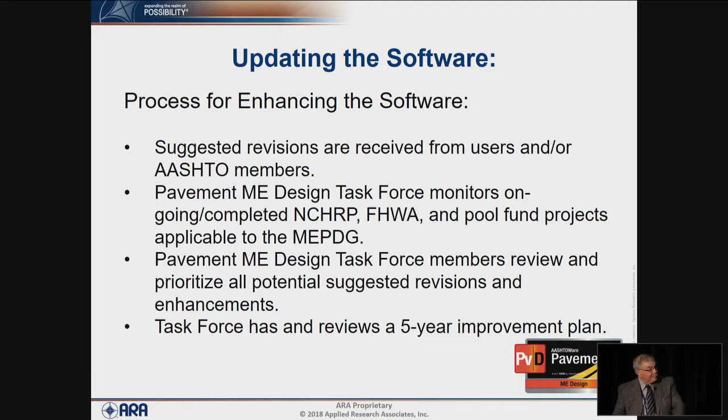The task force has a 5-year improvement cycle. This plan gets updated every year, and some enhancements that are high priority may become lower priority and vice versa. So there is a process for that.

After an enhancement has been integrated into Pavement ME, there's a specific process used to acknowledge that through the community, because the manual of practice for the Pavement ME software isn't updated that often. That manual gets balloted just like normal test procedures through AASHTO, and an addendum is prepared explaining the purpose of the enhancement.

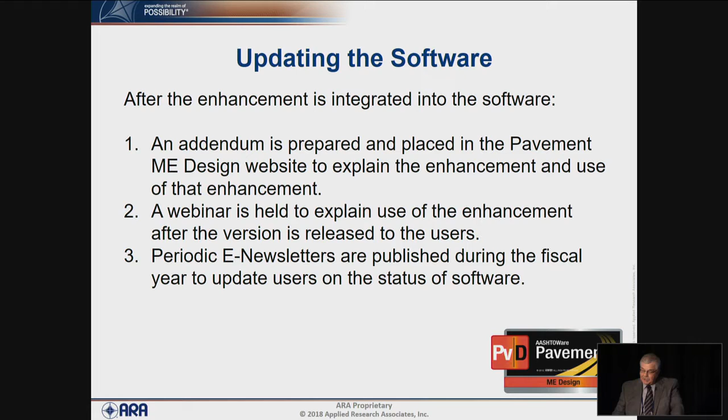What the enhancement is intended to do, and how to use the software for it. After the software is released, which is always July of each fiscal year, there's a webinar held to explain and discuss the enhancement and how to use the software for it. There are also electronic newsletters published through AASHTOware for Pavement ME on the status of the software, improvements being made, and other items of general interest to users or license holders.

Now a little on the enhancements that have been added to the software over time. This is simply a listing of those specific or applicable to asphalt and flexible pavements by fiscal year. As you can see, in fiscal year 2018 there were a number of enhancements made. These do not include enhancements specific to concrete or rigid pavements—only those associated with flexible pavement design and asphalt concrete materials. I'll go through some of these in more detail, since I consider them some of the important ones that have drawn more interest from users.

The first one is just a back calculation tool. Even though it's not an enhancement directly in Pavement ME, it's a tool to help with rehabilitation design, using Pavement ME to do back calculation of layer moduli, and then how those back-calculated modulus values and other appropriate parameters get entered into the Pavement ME software.

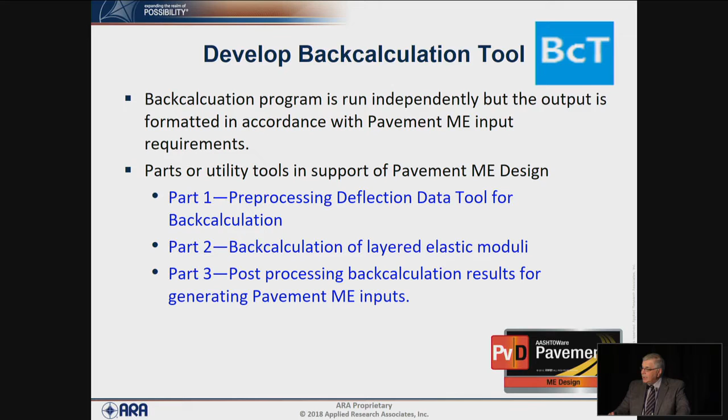The back calculation tool consists of three different parts. Part 1 is pre-processing of the deflection data to analyze and evaluate it by itself. Part 2 is the actual back calculation of the elastic layer moduli. Part 3 is the post-processing of the back-calculated values that then go into Pavement ME.

The next topic has been an ongoing issue: the first climatic data sets were ground-based, and there was a lot of missing data in some of those stations—many stations were missing, with limited time coverage for climate data. So the task force wanted to expand that to include more years and better coverage within the United States or North America.

Originally, the task force authorized a project to include the NARR climate data set, and within about a year that was quickly replaced with the current data set that comes with Pavement ME, referred to as MERRA, specifically MERRA 2. The reason for doing that is because FHWA and LTPP were moving to the MERRA climate data set and providing it for various pavement evaluation and analysis techniques. So the task force picked up on that and established MERRA 2 as the primary climate data set used for flexible pavements.

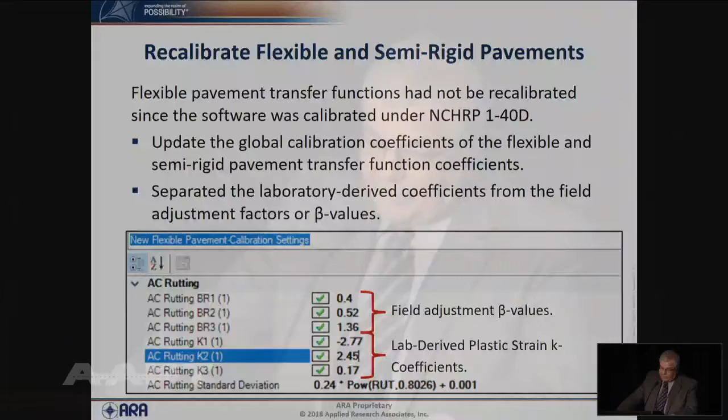Recalibration was a very large enhancement made a couple of years ago. The rigid pavements have been recalibrated about two times since the software was originally released to AASHTOWare. The flexible pavements had never been recalibrated, so this was the first recalibration since the software was released to AASHTOWare, from NCHRP Project 1-40D.

On the surface, it looks like there are very big changes compared to earlier versions of Pavement ME. But the differences really aren't that big for fatigue cracking, some difference in rutting, and not much for low temperature cracking.

We diverted back to what Matt Witczak originally did in calibrating the original software: start with laboratory measured values and then apply the beta values as the field shift. Before the software was released, the flexible team made a decision to basically combine the laboratory measured values with the field shift, so all beta values in the earlier releases were unity, and those were the local calibration factors.

Since many agencies are starting to do material tests in the laboratory, or at least request that testing be done, we wanted to separate laboratory measured coefficients, the K values, from the field shift values, either the beta or the C parameters. That's basically what was done in this recalibration.

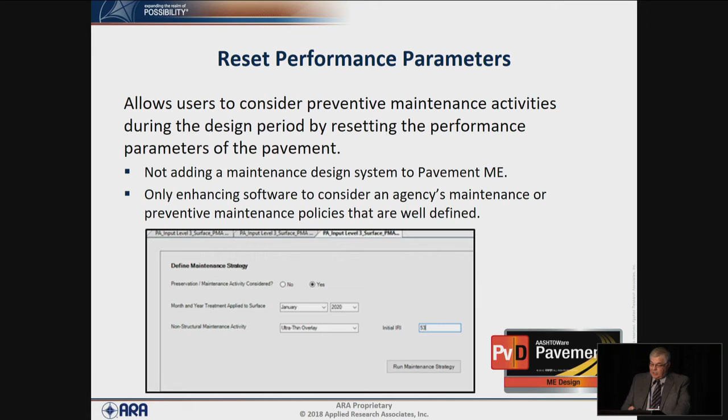Another item was resetting the pavement performance parameters. Some agencies wanted to be able to, if they were doing a non-structural maintenance or pavement preservation technique that changed the pavement surface profile, take that into account within the design procedure. The task force made that a high priority a couple of years ago, so resetting the pavement performance parameters to consider various maintenance treatments or non-structural pavement preventive maintenance treatments was included in Pavement ME.

Now going through very briefly what's coming. There are three items. The first is what many agencies have been requesting, the top-down cracking model integration. This is the model that Bob Lytton is developing, or has developed, from Texas Transportation Institute. It's based on fracture mechanics, and that current model approach is being integrated into Pavement ME currently, and should be available in next fiscal year, I'd say early next fiscal year.

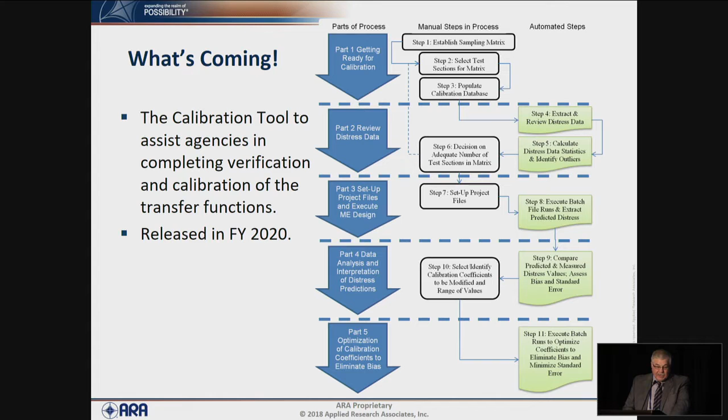The other item that's coming, also widely requested, is the calibration tool to assist agencies in doing the calibration. It's currently being developed and will be released as an assistance tool. It's not directly embedded in Pavement ME, but it's a tool to assist agencies in doing the local calibration. It consists of five parts, and it's also going to be released early next year.

A big item coming for all AASHTOWare products is moving the desktop Pavement ME application to a web-based technology application, and this will affect all AASHTOWare projects. Pavement ME, I think, is one of the first being transferred over from desktop to web-based technology interface. We're currently working on that, and it's due to be released in fiscal year 2022, approximately.

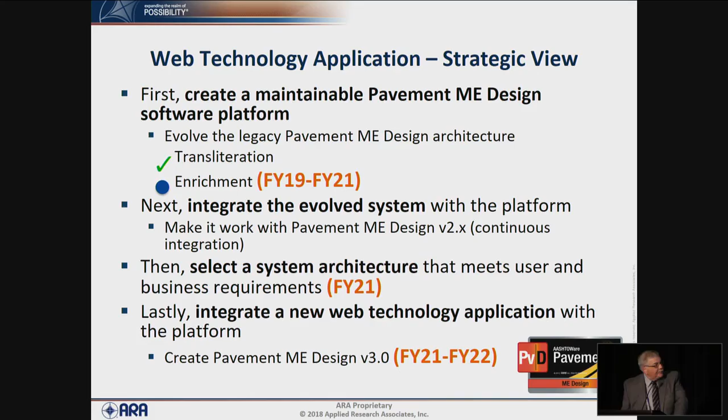I've shown in this slide some of the steps and processes being made. We started this about a year ago, and we're heavily involved now in moving it from a desktop application to a web technology application. You can see the timeline for the four major steps that are ongoing. We've completed the first part, evolving the legacy software to the new architecture, and we're into integrating the evolved system with a new platform. This is more IT, and I'm not an IT person, so I'll be very brief about that.

And basically, that's the update. So I'm going to turn it back over to Kevin.

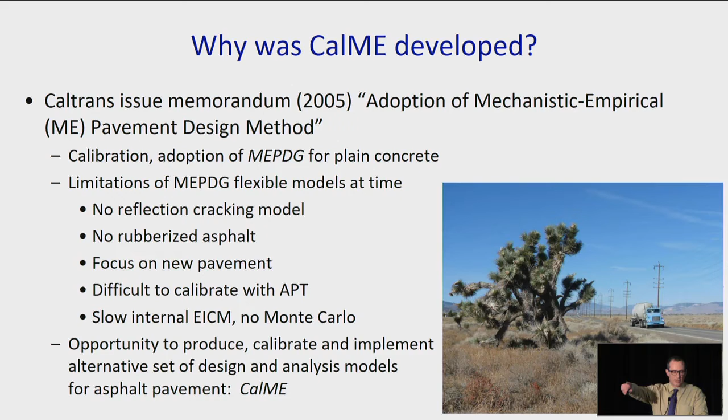Version 1 was introduced in 2006. We're on the current version of 2.0, which is also a desktop approach at this point. The focus of everything we did was on rehabilitation and preservation.

We use what's called an incremental recursive approach. How many have heard of an incremental recursive approach? Okay, so let me explain it briefly. The main idea for this came from Per Ullidtz at the Technical University of Denmark, and he was a major driver for much of the technology that we used at the beginning.

In incremental recursive analysis, you start with the initial properties of the material in terms of aging, damage, fatigue damage, and permanent deformation. In the first day, hours of the first month, you apply loads and you damage the material. You adjust and you age it. You adjust the stiffness of the asphalt based on the aging model and on the incremental damage that occurred.

For the next set of loads in the next hours, you update the damage. You proceed through every month of every year updating the damage. So what you should have, if the models are working correctly, is that you should be able to actually predict the damage in terms of loss of stiffness, change in stiffness due to aging, and permanent deformation for each month of every year through the entire life of the pavement. So that's basically what that says there.

The damage models are shown here. They include asphalt fatigue, bottom-up asphalt permanent deformation based on shear stress and strain, full-depth reclamation damage. We've got the foamed asphalt done. We're working on the cemented and engineered emulsion right now, and cold in-place recycling and cemented soils, looking at both fatigue damage from the bottom up and crushing from the top down.

Sorry, I've been teaching 2 classes and 10 hours of meetings a day, so I'm losing my voice a little bit. The distress models, then, we simulate what's happening with the damage, and then we calibrate the damage to the asphalt cracking and the unbound layers rutting.

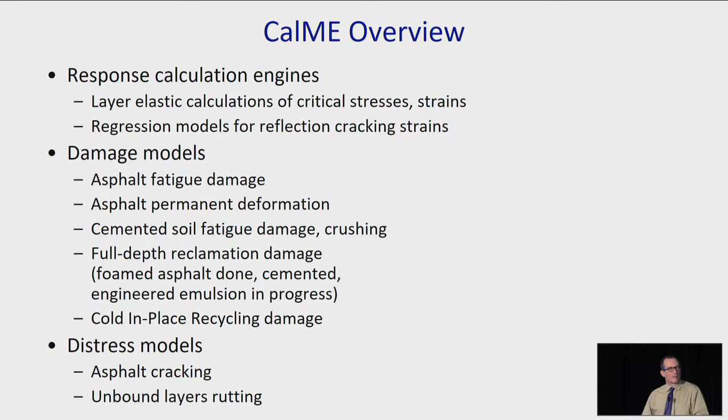Aging and rest period models are included for the asphalt. We knew historically from the shell method that shift factor can vary greatly depending on the rest periods between the traffic. We wanted to account for that. It's not well calibrated yet, but we do have a model that accounts to some degree for that.

Primarily, it helped us look at the difference between heavy vehicle simulator without stopping the loads and test tracks, which have rest periods between the loads. We're calibrated for 27 heavy vehicle simulator sections, WestTrack, some sections from the NCAT track, MnROAD, and the CEDEX track in Spain, and 4 California field sections. We use Monte Carlo simulation for reliability.

The definition of what reliability is and which variances we consider in that. Right now we're primarily looking at within-project variability, and then looking at sensitivity analysis to look between projects considering different contractors and material sources. Although that's something we're revisiting for version 3 right now.

A fundamental part of this was the development, at the same time, of a back-calculation program, because we primarily are dealing with existing pavements. We want to rely on deflection back-calculation to characterize those, both in terms of variability of the underlying structure as well as the materials properties. So CalBack was invented as a sister program that goes with that. CalBack loads directly up into CalME, gives you your materials properties, and also gives your variance of the stiffness, which is considered in the Monte Carlo simulation.

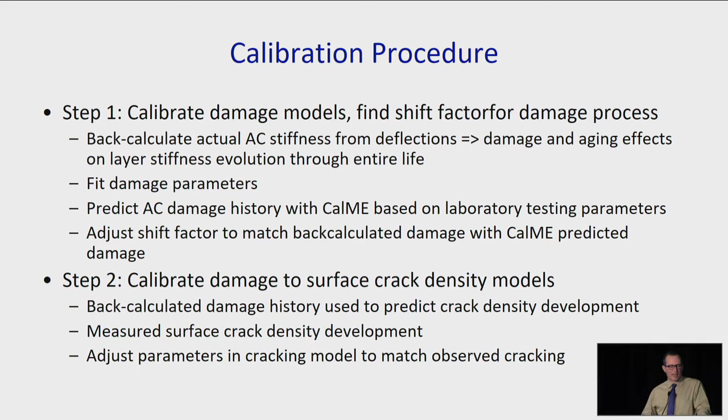The basic parameters, like Harold was saying, are developed from laboratory testing, and then we adjust those for the damage process, and then we have a separate shift factor to take us from damage to cracking, which is the second part.

Incremental recursive versus Miner's law. So we characterize the material in terms of the damage process for different strain or stress levels, depending on what's critical. We then simulate the damage process for the entire life, for each data acquisition time that we do. Then, once we've got the damage models done, we correlate damage to distress, and we calibrate the damage process using every data acquisition we do through the entire damage process.

So every time they went out on WestTrack and did back-calculation, that's a calibration point. The next time they go out, that's a calibration point. We calibrate the entire process.

With Miner's law, which was actually what we used in our precursor to this, we basically characterize the material in terms of repetitions to failure and end state. And then we look at potential paths to that end state, which occur across the first year. We get our big N from that, our various big N's, and then we estimate the little n's, the traffic that's coming, and look at that damage ratio. And then we have to calibrate to the end state.

To be able to calibrate a Miner's law, you have to have carried every one of your sections to the end state, because otherwise you don't have a data point—you have a right-hand truncated data point.

So one of the other things we knew from our APT is not all of our sections failed. Not all the WestTrack sections failed. Not all of our APT sections failed. But we can still calibrate the damage process on every single section without biasing our data set by eliminating those that didn't get to the final cracking end state.

Now the little green light's on. So this is an example. I'm afraid to push the pointer here, but I'm going to try it.

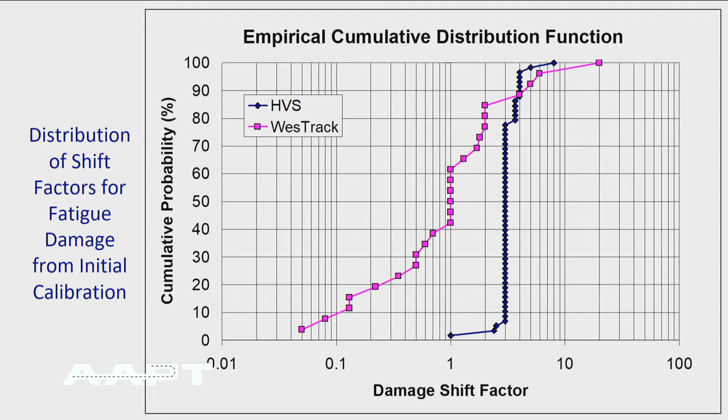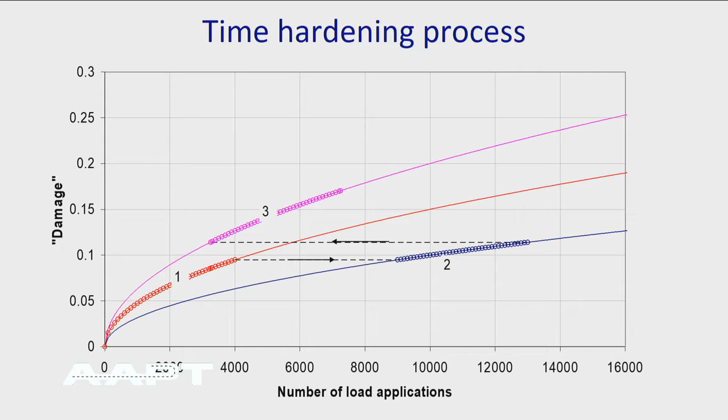How do we step between these? We use a time hardening process, which basically assumes that damage is irreversible. We've cross-checked this a bit with a strain hardening process, which moves the other direction as we move between damage curves. There was some change in the result, but this was the assumption we went with - no reversal.

We're accounting for whether we want to call it thixotropy or healing through our rest period function, which is an adjustment on our shift factor for the damage - sorry, on the damage parameter.

Time hardening, by the way, has been around. Carl Monismith suggested that from research done with Pell and others back in the 60s.

For reflective cracking, we're using the same approach as bottom-up fatigue cracking, except that the HMA bottom strain is from the finite element via regression equations. For HMA on HMA, we're using the average maximum tensile strain at the crack tip. For HMA on PCC, it's the bending strain at the crack tip, assuming local debonding of about 100 millimeters on each side of the crack, which comes from our colleagues at Tongji. We're also using thermally induced strains using models from the University of Minnesota.

This is what one of my colleagues calls a confusogram. Okay, let me move on.

No, the top is the regression equation through the finite elements. The main point is to look at the variables in this - these are variables we have very good data for. This was a finite element run in 2D. We calibrated the 2D to 3D, developed the regression equation, and calibrated that equation for the damage process.

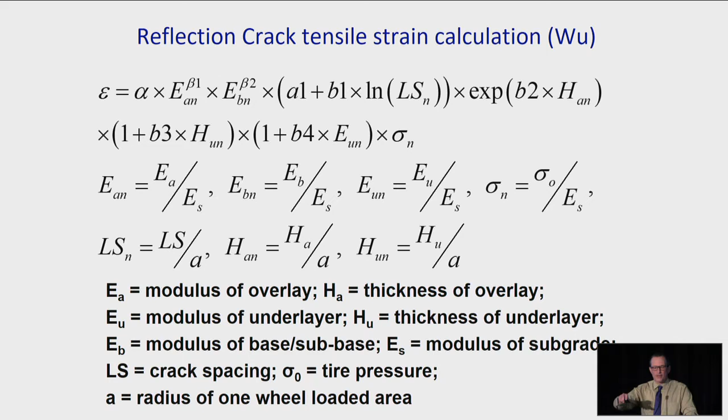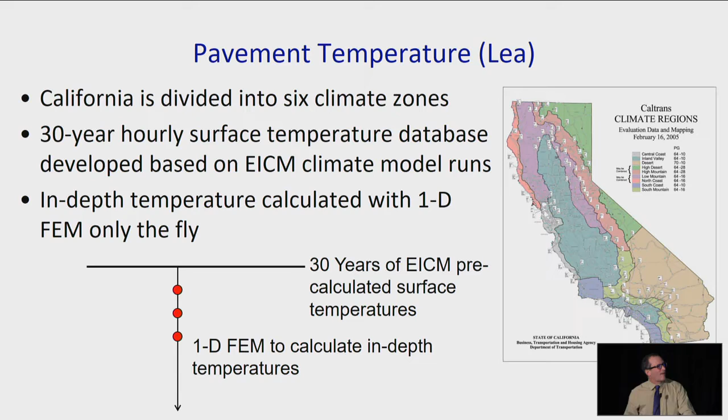For pavement temperature, we have a lot of climate zones. We're using EICM runs, but we're not running EICM directly. We use a fast 1D process that gets the surface temperature out of our EICM database and then comes up with a temperature profile. We've calibrated this and it works extremely well, and it's super fast, which allows us to run Monte Carlo.

So what we can simulate - this is one example. We've also programmed into this that you can build in your pavement preservation triggers, based on damage, cracking, or time-based maintenance, and actually simulate the entire process over 40 years.

Current stat - did I miss one?

We have a lot of weigh-in-motion data built into there so that local folks can do their class 9 to class 5 counts and predict an axle load spectrum based on regression through 115 WIM stations.

I talked about the simulation processes. The way this works now is you can run, say, 100 Monte Carlos simultaneously, walking through the 40-year analysis for all 100 of those in about 10 minutes.

Current status - this is primarily, Gail, I'll answer your question before you ask it - primarily being used for AC long life. It's in the highway design manual that any design for 40 years or longer, or a high traffic index, has to use CalME.

Caltrans, we're just learning - we haven't had any money for six years. Nobody even remembers how to do the Hveem R-value design. We're fixing that software, getting that out. We're now starting to get $2.5 billion more a year for maintenance and rehabilitation based on our gas tax.

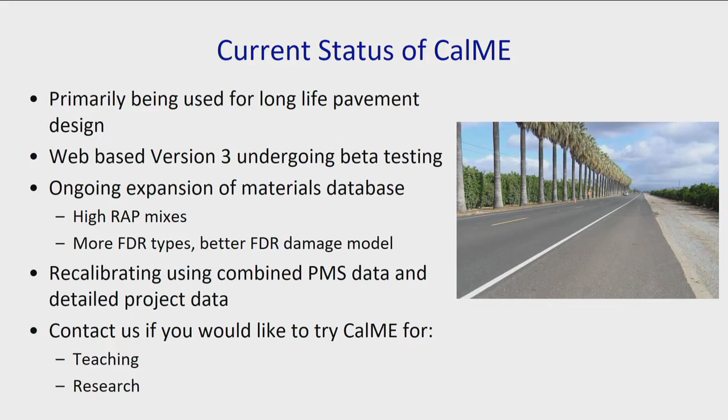And we're expanding this - we are web-based. We're beta testing the web-based version 3 right now.

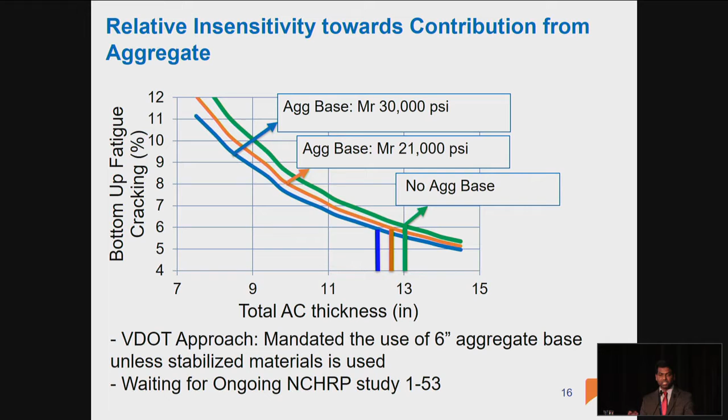What we did is mandate the use of 6-inch aggregate base, based on our experience using it as a construction platform, unless we use cement-treated aggregate. We are waiting for the NCHRP 1-53 study that Professor Bob Lytton from Texas A&M is doing. We're waiting for the results, so hopefully future MEPDG versions will accommodate the new models.

Same thing with subgrade sensitivity. If you're familiar with AASHTO 93, subgrade modulus was very sensitive, but in AASHTO Pavement ME it's not very sensitive with different subgrade types. So we haven't changed anything; we're still waiting for the NCHRP study to make changes.

The other issue is modeling semi-rigid pavement and recycled layers. Like I mentioned, we use a lot of cement-treated aggregate and cement-treated full-depth reclamation. The version we're currently using is 2.2, though one more version has since been released. But version 2.2 is very insensitive to thickness and modulus values for semi-rigid pavement - if you input different CTA modulus or thickness values, it's very insensitive.

So what we did is model it as an aggregate base, but use a high resilient modulus of 80,000 PSI, both for the cement-treated and FDR cases.

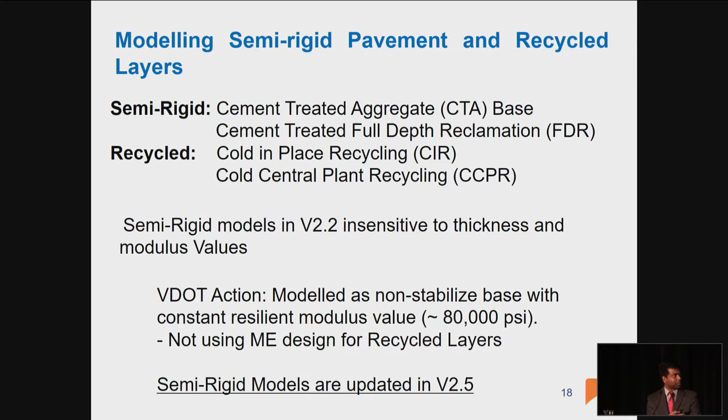For recycled sections, both cold-in-place recycling and cold central plant recycling, we are currently not using MEPDG. There's a challenge because when you use CIR and CCPR as a flexible layer, like Harold mentioned, Pavement ME is very sensitive to air voids and asphalt content, and the bottom-up fatigue cracking model uses the bottom layer, which in this case would be the CIR. In the field you usually get higher air voids for the recycling section, so you have to be careful when inputting.

Another issue is sensitivity to asphalt mixes. We developed only one calibration factor for asphalt mixtures. When we use SMA mixtures, it predicted very high rutting, which is against our field experience. This is because SMA mixtures usually have higher binder content, and when tested in conventional dynamic modulus testing, it gives lower modulus, which in turn predicts higher rutting. So we plan to develop mix-specific coefficients for SMA in the future.

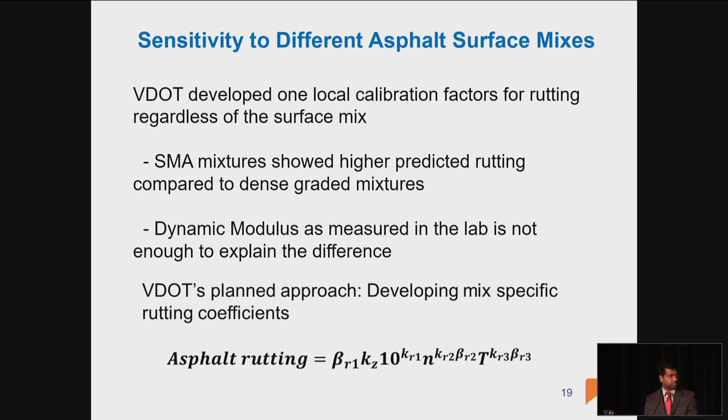Outreach is very important. We formed a technical working group with members from VDOT, both asphalt and concrete pavement industry, aggregate industry, and federal highway. We discussed all the issues and came up with solutions, and got their support, which was very instrumental in the implementation.

We also trained our local consultants. Some lessons learned: for implementation we need help from all the different divisions within the agency, like materials, maintenance, construction, and we also need industry and external stakeholder support. Training is a very important factor, and developing a user manual was very instrumental in the success. Local calibration is key.

Sites need to have a certain level of distress. We need to develop a well-established database, so whenever a future version comes out, it's easy to do a local calibration.

We need to have both short-term and long-term plans. Short-term plan is how to update the ME user manual. Future long-term plan is how often we have to do local calibration, how often we have to characterize the materials or traffic inputs. Those are the long-term plans.

For future steps, currently we are using this for new construction or reconstruction. Most of our work is on the rehab side, so we wanted to use this in rehab design also. We are currently working on more material characterization, and we have yet to install the new version. Before that, we have to do a lot of sensitivity analysis. Harold mentioned climate change, and we have to do a sensitivity analysis for what changes that brings.

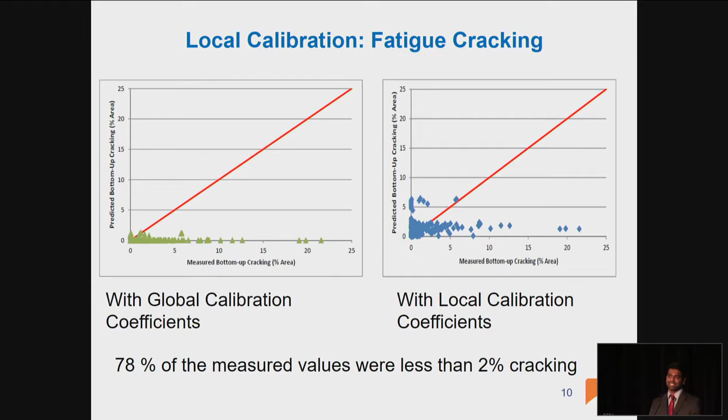Thank you. Thank you.

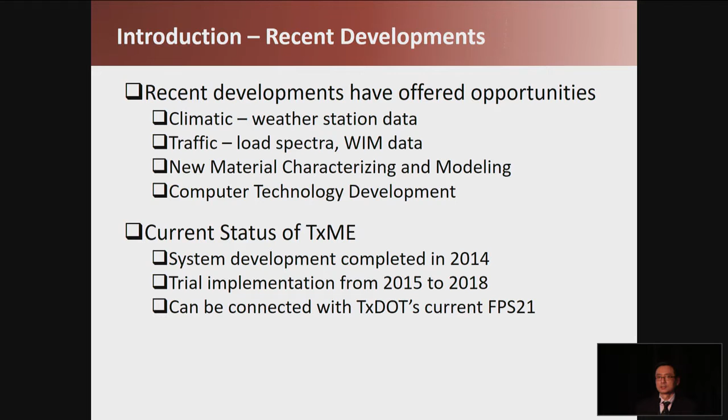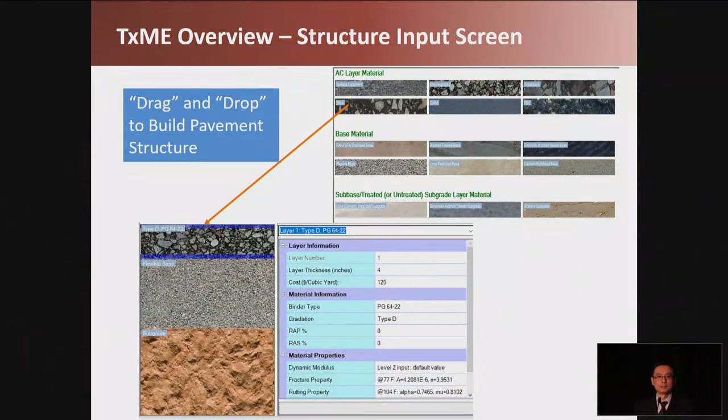So here is the structure input screen. Basically, we have several material type icons listed in the screen. Users can drag these icons and drop them to build the pavement structure directly. Then for each layer, users can click the layer to input the layer thickness and other material properties.

For the climate input, users only need to select the weather station, and the program will automatically load the hourly climate data into the program, which will be used to determine the pavement temperature at different depths.

For the reliability input, users can input the coefficient of variance for different inputs, like thickness or modulus, and the Rosenbluth method will be used to perform the reliability analysis. This method is faster than Monte Carlo because the number of simulations required is much less, so it will be much faster.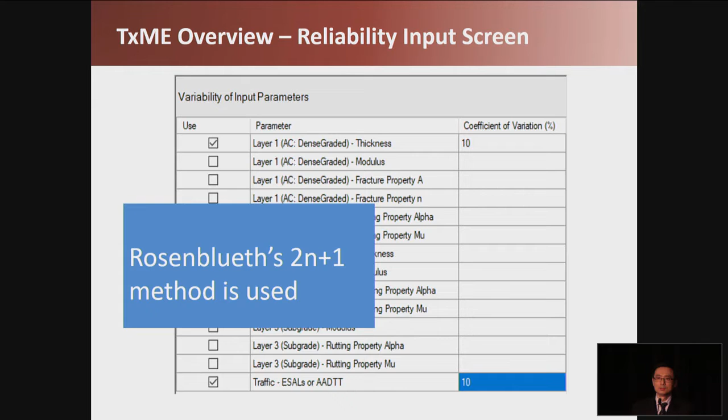And for the traffic part, I will have more screens later.

To make the program more convenient and more practical, we tried to develop a default value system. For example, for the material property default values, we developed the properties for almost all Texas typical mixtures.

In this study, we focus on the influence of the RAP-RAS contents. Here is an example of the test matrix used to determine the default values. You can see here, for example, this is Type D, a dense gradation. We have different binders, and for each binder, different RAP content and different RAS content. Similarly for the SMA with different binders. So this is the test matrix we used to try to find relationships for these material properties.

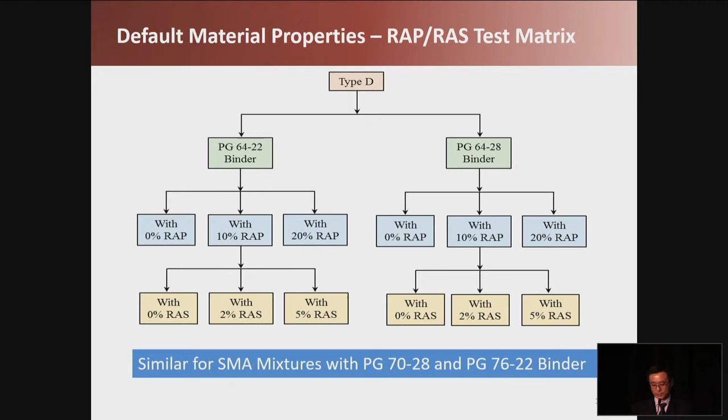Similarly, we did this test for the fracture properties and the rutting properties. So we developed these default material properties and incorporated these values into the program.

Here we show the input screen for the material property. Users only need to choose the binder, the PG grade, the gradation like Type D or Type C, and the RAP content and the RAS content. Then the dynamic modulus, fracture properties, and rutting properties will be automatically displayed in these items.

Of course, if users have lab test data, they can input it and modify these values. But here we provided this default value system, so that will make the program much more convenient to use. Users—it's not realistic to expect that users always have all complete, detailed information.

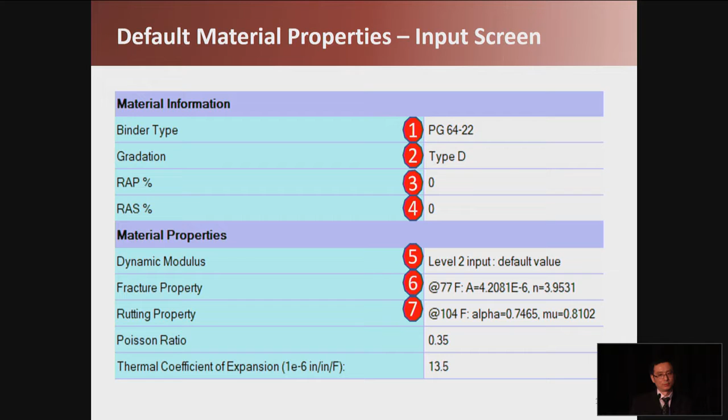For the default load spectra info, we all know it's sometimes very tedious to prepare and input this load spectra info because there's a lot of numbers involved, like vehicle class distribution, axle load distribution, monthly adjustment factor, and vehicle class distribution. There's so much data.

So here we use the WIM station data from Texas and divided this data into different categories. For example, based on the road, we divide it into 4 types of road: interstate highway, state highway, farm road, and energy section. Energy section is the area where we have gas and oil.

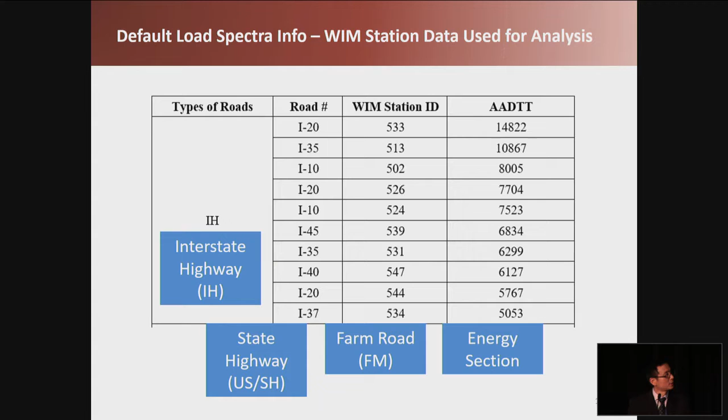So here the table shows the weigh station, or the WIM station, in the interstate highway.

So we based on the volume of vehicle class 9, the 18-wheelers, to divide this volume into 3 categories: heavy volume, medium volume, and low volume.

Similarly, for the axle load distribution, we also divided this into 3 categories: heavy axle load, medium axle load, and light axle load. Because the axle load is different from the volume.

Although the truck can be empty or can be full, so the actual load is different.

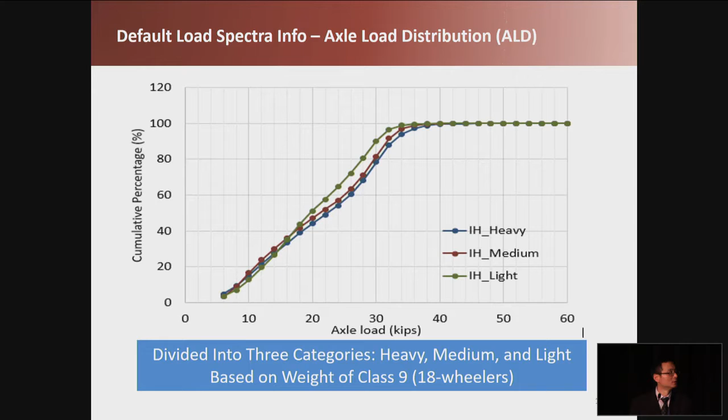Basically, in the program, users only need to select the highway type and the vehicle class distribution type, like high, medium, or low, and also the axle load type.

Then the vehicle class distribution numbers and the axle load distribution, monthly adjustment factor, and all this information will be incorporated and loaded up in the program. So users do not need to input any numbers.

If users have the WIM station and have the detailed numbers, they can edit and modify these numbers.

So to verify the program, we identified 11 test sections in 6 districts. For each section, we collected the material for each layer and conducted a lab test to determine the material properties, and also collected the traffic information and input all this information into TxME to make predictions.

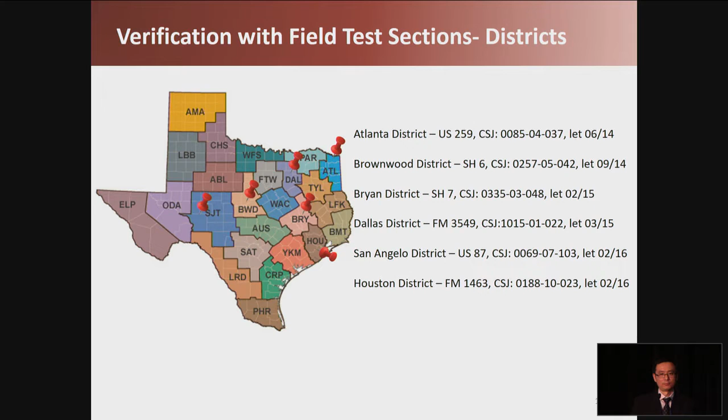Also, we conducted a performance survey. We want to compare our prediction with the field performance, with the survey results.

For the traffic, when we assemble traffic information, there are 2 resources we can use. First, we can use the TxDOT statewide planning map.

In this map, for each road, users can get information like the AADT value and the truck percentage. Based on that, we can calculate the ESALs.

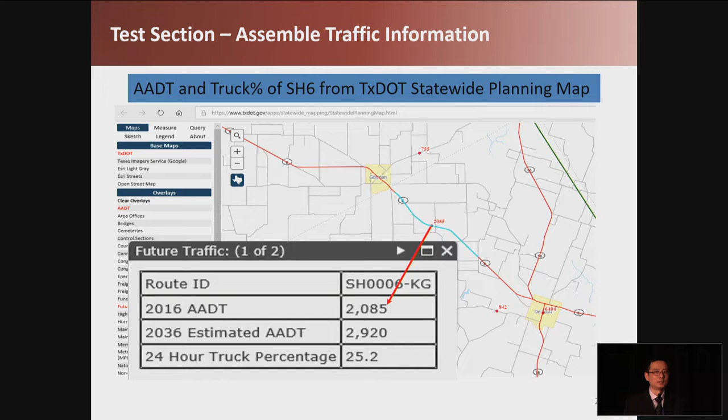Or we can use our portable WIM data. We put sensors on the road to collect the detailed load spectrum information using this portable WIM station. So this is in the real test section, SH6.

So I will compare the SH6 to present that comparison result.

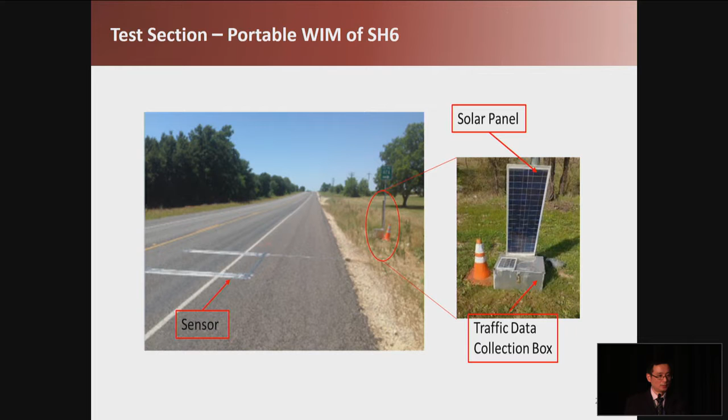So basically for the 11 sections, more than half of them, because the time is not long, didn't show any rut depth or any cracking. And also our prediction also didn't show any crack or rut at this time.

For test sections like SH6, SH7 section 1, and FM 3549, we did see some failures - the first 2 had rut depths, and this one showed thermal cracking.

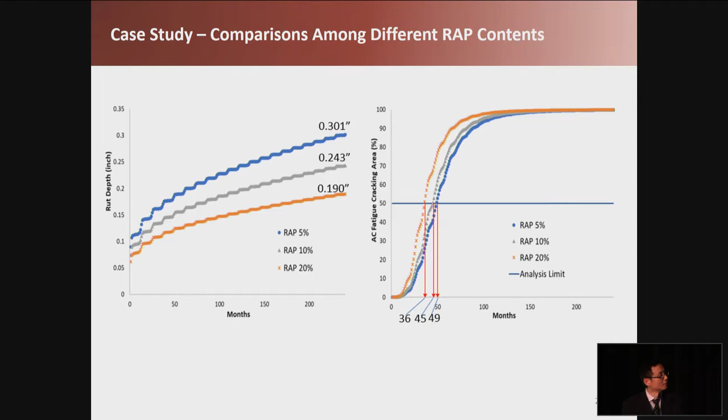So basically, the higher RAP, you will have less cracking life, but less rut depth.

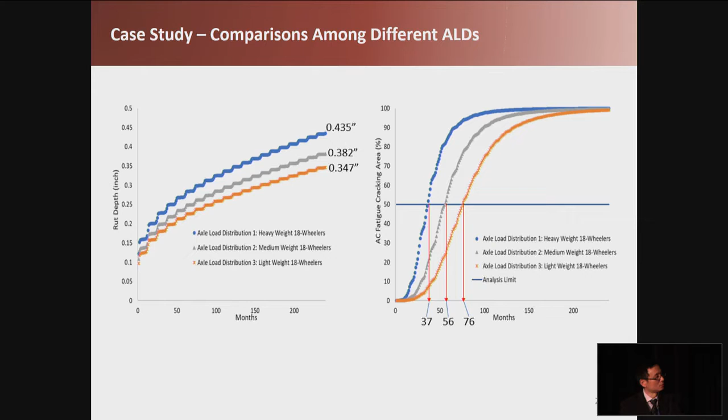So here's the summary and conclusions. In this study, we developed the default material properties and default load spectra and incorporated them into the TxME to enhance the...

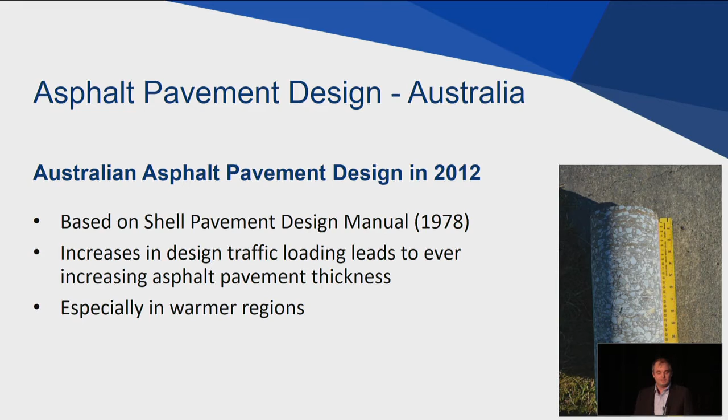Which, contrary to what you may expect, was not welcomed by the asphalt pavement industry, because that meant that the white stuff that shall not be named became more competitive. And that was especially true in the warmer regions of the country. Now, that's not necessarily the fault of the Shell pavement design method, let me state that clearly. It was more the implementation that was used in Australia.

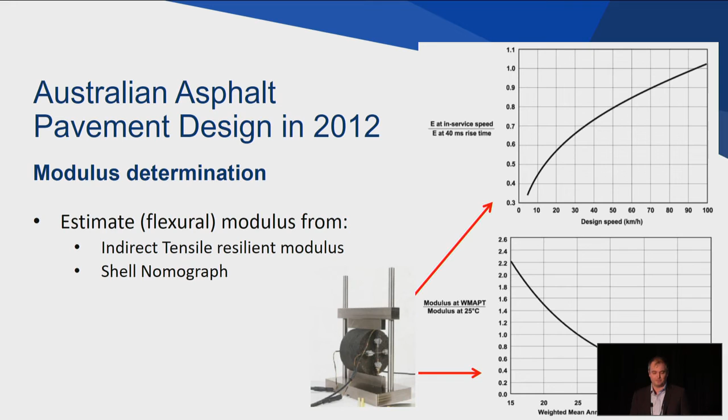One of the issues was that to determine the modulus, they used indirect tensile resilient modulus, with a very simple approach done at a single load frequency and a single temperature. Then there were very simple functions to predict the modulus at different design speeds and temperatures, and to estimate the flexural modulus, which is what's used in the Shell pavement design method.

And when it comes to asphalt fatigue prediction, many people wouldn't like to admit this, but what was in the Austroads guide was basically just the Shell laboratory model, developed for 12 mixes in the 1970s, tested in laboratories by Shell in Europe. That model was used in the Austroads design method unchanged. The only thing added was a laboratory-to-field shift factor, which for major roads was 1 - so basically we were predicting that the fatigue performance in the field was equal to the fatigue performance in the laboratory of a beam. So that's as it stood in 2012.

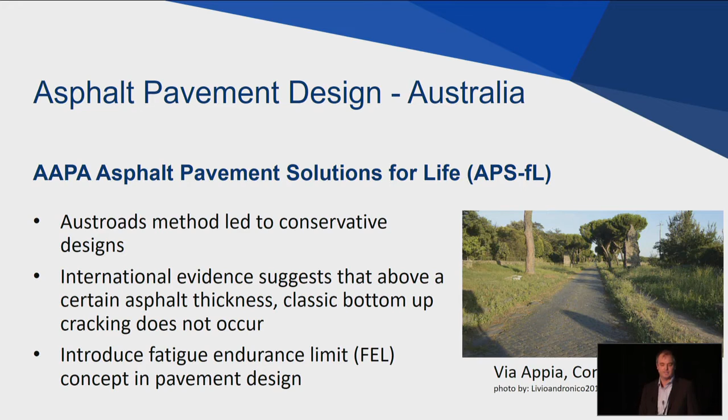So against that background, the Australian Asphalt Pavement Association started the Asphalt Pavement Solutions for Life project, recognizing that the Austroads method led to overly conservative designs, especially in the warmer parts of the country, and also looking at international evidence suggesting that above a certain pavement thickness, the classic bottom-up fatigue cracking we're designing for does not occur. So they were looking to introduce the fatigue endurance limit concept in the Austroads pavement design method.

So it was very heavily focused towards dynamic compressive modulus, developing a database for typical Australian mixes, coming up with a laboratory-to-field interconversion for that modulus, and then also determining the relationship between dynamic modulus and current Australian test methods, so that would have been the resilient modulus and the flexural modulus.

Unfortunately, that's not easy to do. Developing a robust relationship between flexural modulus and resilient modulus is quite straightforward, well, we've published the best we could do in terms of coming up with a relationship between flexural modulus and dynamic modulus, but it's not a very robust relationship. And why that matters, I'll come back to a bit later.

And then they developed a recommendation. The objective was to recommend a method to incorporate the fatigue endurance limit into pavement design. So there was a lot of work done on dynamic modulus testing for typical Australian mixes.

Won't go into that. But this is, I think, the most important part of the work that was done. That was identifying the fatigue endurance limit, and they looked at a very wide range of actual field performance data from across the world. So there's NCAT sections in there, there's outcomes of the UK Velman project, which basically looked at the whole road network in the UK, and then there's a lot of Australian sections there.

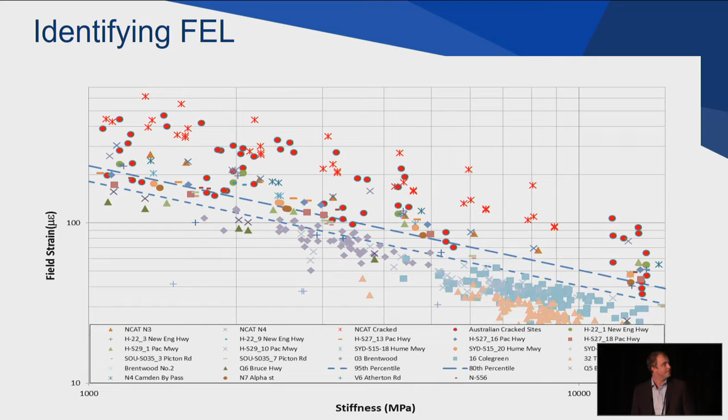Now in terms of incorporation into our national design method, that did run into a couple of problems. Like I said, the procedures they followed were very heavily geared towards the use of the dynamic compressive modulus, which is not really compatible with the Austroads design method.

And as a result, all that could be done was run a lot of comparative analysis. And in the end, the road agencies were only comfortable with introducing a maximum design traffic limit in the design guide based on some of this comparative analysis. So basically the agreement is that you do not design your pavements for more than these maximum design traffic limits, and therefore you're basically limiting the thickness of your asphalt pavement.

Those limits are temperature dependent, and that is to recognize the influence of modulus on that fatigue endurance limit. It is also a recognition of the fact that the states in the south of the country, where it's a little bit cooler, were more comfortable with the thicknesses they were getting out of their design method than the states further north, where it's warmer.

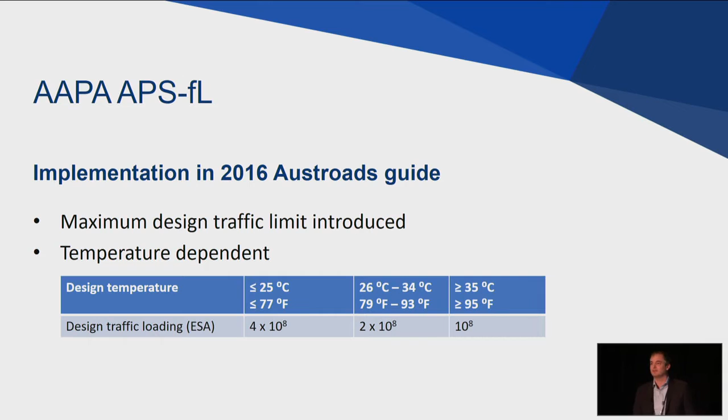So I've put the design temperatures there in Celsius and Fahrenheit. Basically, for Queensland, you would be designing pavements for no more than 200 million equivalent standard axles, which seems like a lot, but if you consider that pavements in Australia are typically designed for 40-year design periods, that's not unheard of.

Okay, then in terms of the other improvements that we made to our mechanistic empirical design guide, we improved the characterization of the design modulus. We corrected the way we test our mixes for fatigue to better correspond to the ideas or the models by Shell. And we also improved the modeling of heavy vehicle standard axle groups, but I won't be able to discuss that due to time today.

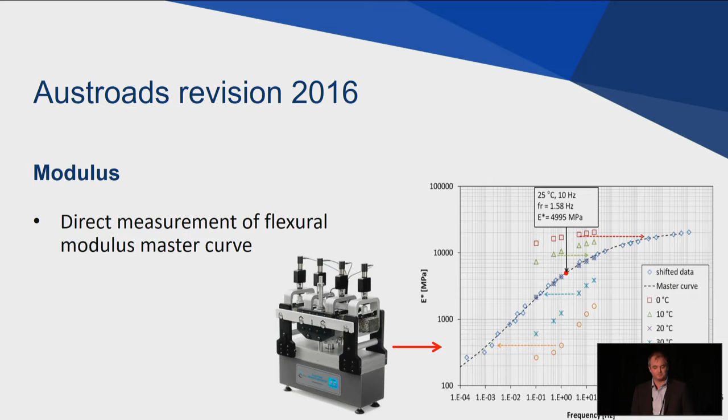So in terms of modulus, it is now possible to directly measure the flexural modulus and use the flexural modulus master curve in pavement design instead of those resilient modulus assumptions. And what that does is immediately reduce the pavement thicknesses for the pavement in the warmer parts of our country.

What I've shown in this graph is the resilient modulus result, that's the dot, and then the predicted resilient modulus at different load frequencies, as it used to be done in the Austroads design method. That's the dotted line, the straight dotted line. Compare that to the flexural measured modulus, which is the continuous line, and you'll see that at the lower loading frequencies, or the higher temperatures, you get a higher modulus, which corresponds to thinner pavements.

Then, in terms of fatigue, we had a problem. You may be familiar with the discussion around Haversine and sinusoidal testing in fatigue testing. Under Haversine displacement loading, you get a sinusoidal strain response in the sample after a number of load repetitions.

Now that's not a problem if you've used your Haversine testing to calibrate your fatigue models. Unfortunately, in Australia we were using a European design method, which was based on sinusoidal testing, in combination with a US test method. The test method in Australia was based on an early version of AASHTO, used Haversine loading, and as a result, the difference in definition and strain in the test method and the design method was a factor of 2.

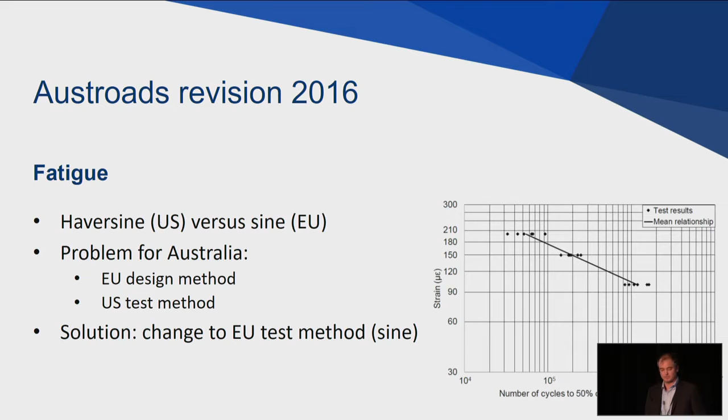So the solution was quite simple. We just changed to the European test method.

So what all of these changes do to the Australian design method is that it now allows the use of mix-specific modulus and fatigue models, so you can characterize your material. Some road agencies allow contractors to characterize their material in the laboratory, come up with a modulus master curve and fatigue function for their material, which I'll show on the next slide how we do that.

So we test 27 beams divided over 3 temperatures, come up with a fatigue laboratory model for that particular material, as is shown, well, the function is shown at the bottom there. So basically, the fatigue performance becomes a function of the strain level and the modulus of the material. And then you replace that Shell laboratory model, which was developed for 12 mixes in Europe that have very little to do with current Australian mixes, with an actual model that was developed for your material.

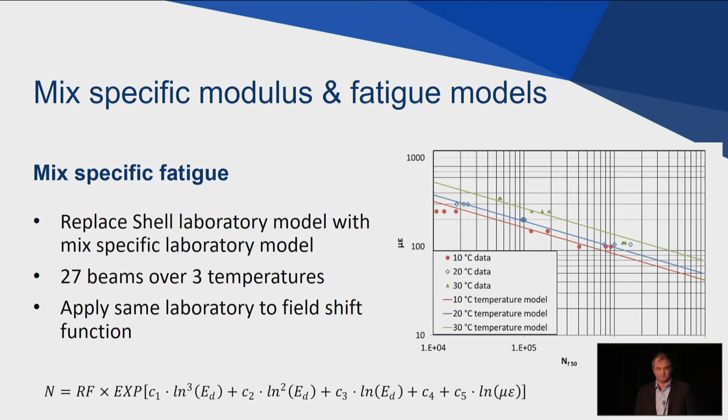So in conclusion, we've stopped the trend of increasing pavement thicknesses, provided that these concepts are being used in the design.

That's also because we've introduced EME2, high modulus asphalt, which has also contributed to that. And I know that there's work being done in the US on introducing EME2. I think that's great. By the way, don't go putting polymers in there. The most cost-effective solutions you can get by just using straight harder bitumen.

That's a side note. Perpetual pavement designs are now considered for major projects, and I hope that in the panel discussion we can have a bit of a discussion around that, how that's being done in the US. The discussion I have with road agencies generally for their major projects is, can you really afford not to make this pavement a perpetual pavement?

The difference between a perpetual pavement and a 40-year design life is typically something in the order of 50 millimeters of asphalt, so 2 inches. And that is not a major cost on those projects.

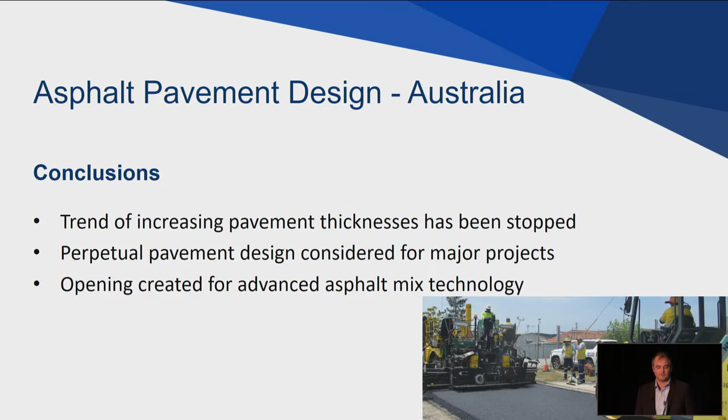And we've also, by introducing the mix-specific modulus and fatigue functions, we have now created an opening for advanced asphalt mix technology like EME2, to get the full benefits of EME2 or other polymer-modified high-performance mixes. Thank you very much.

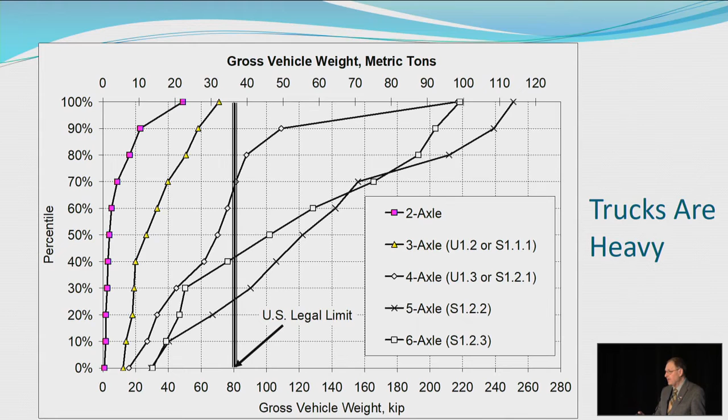I'd point out the information we had about truck loads. These are gross vehicle weights, not axle loads — a 5-axle truck in the United States is limited to 80,000 pounds. In China, for 5-axle trucks, only 27% are less than 80,000 pounds, and if you take that line upwards, the 100th percentile is 252,000 pounds on 5 axles. So these are much heavier loads than what we're used to seeing.

So the design loads we ended up using were chosen after analyzing the traffic information we had. You'll notice, for example, the tandem axles on a 5-axle truck — the design load, which is the 90th percentile, is 76,000 pounds. That's almost equivalent to the gross vehicle weight of an American truck.

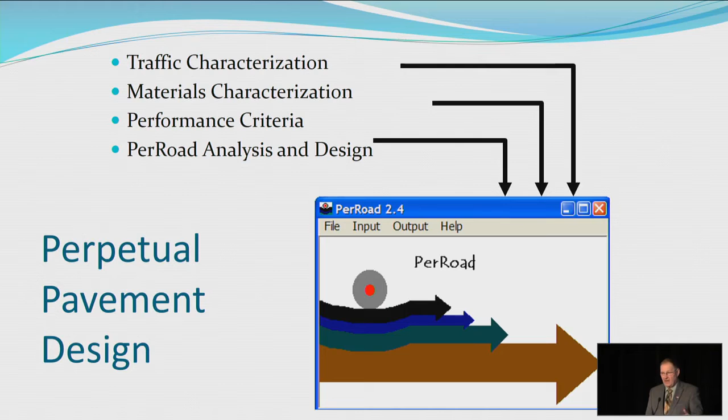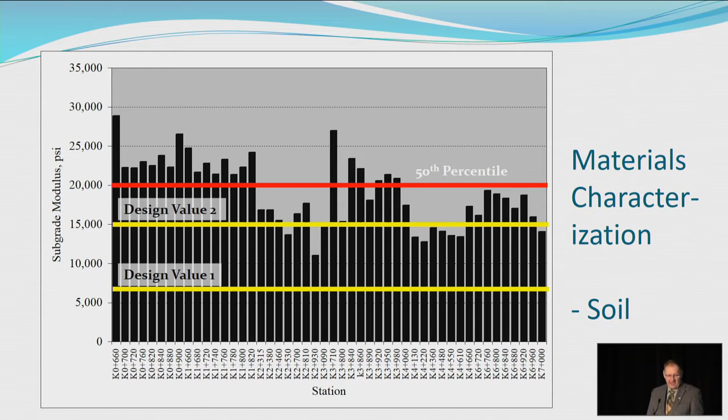We had materials characterization along the route, which was approximately 3 miles. We built 5 sections, each varying in length from half a mile to 3/4 of a mile. The difference in length was because of bridges — we built between different bridges.

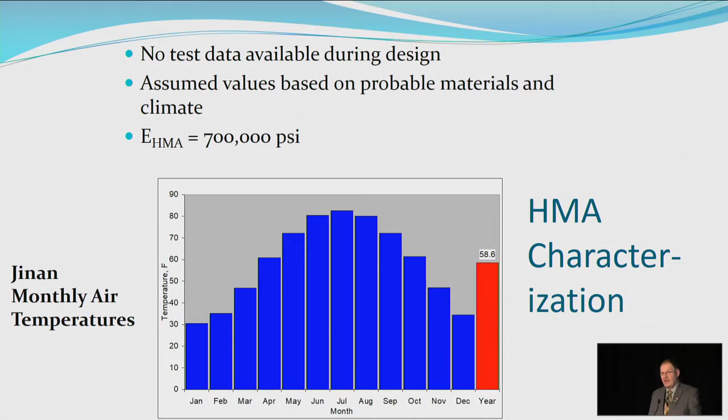We didn't have a lot of information on the HMA modulus. We did have weather conditions, which we converted into pavement temperatures, and were able to select an equivalent modulus for the HMA.

The design methodology — and by the way, this evaluation of materials and PerRoad analysis, I should note, these are David Timm's slides, Dr. Timm's work, part of the work I'm presenting to you. The analysis he used was the standard approach: tensile strain at the bottom of the HMA layer and vertical compressive strain on the lower layers.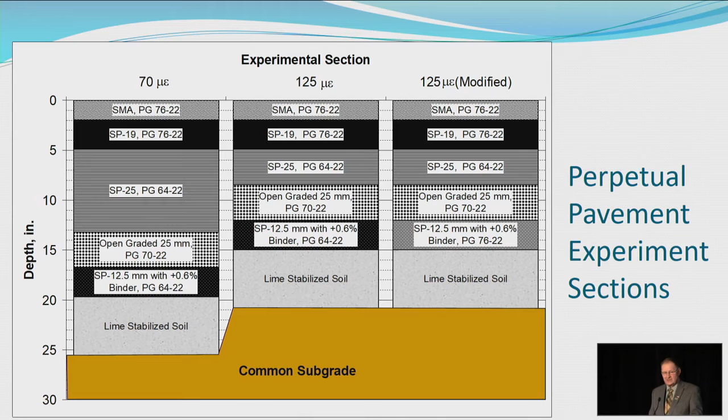This ended up being three sections that in China they called the American test sections. One was built to 70 microstrain as a limiting value, and 2 were built to 125 microstrain. The difference with the 125 microstrain sections is that one had different considerations for both the base layer, a polymer modified asphalt binder, and the subgrade modulus. Putting that into context of all 5 sections built, there you can see the 3 U.S...

Sections, and you can see the 2 China sections. The 5th one is the design that was being built, so that became our control section.

The U.S. ones are built directly on top of lime-modified soil. The 2 China ones have pozzolanic, cement-treated layers between the lime-modified subgrade and the HMA on top. Test section 4 has quite a bit thicker HMA, but still has the pozzolanic layers. Test section 5 is quite thin, about 6 inches thick, of HMA over top of cement-treated base.

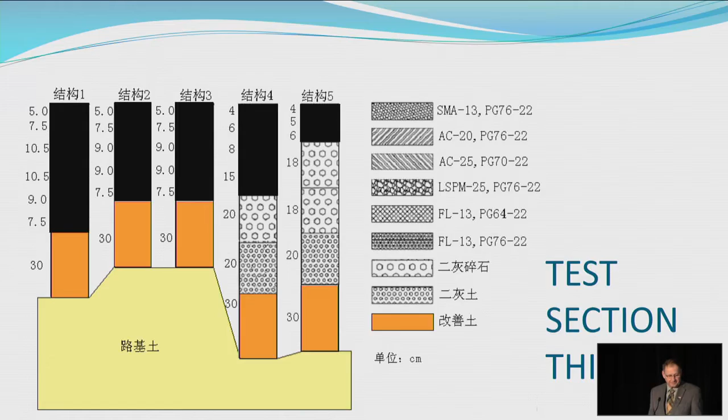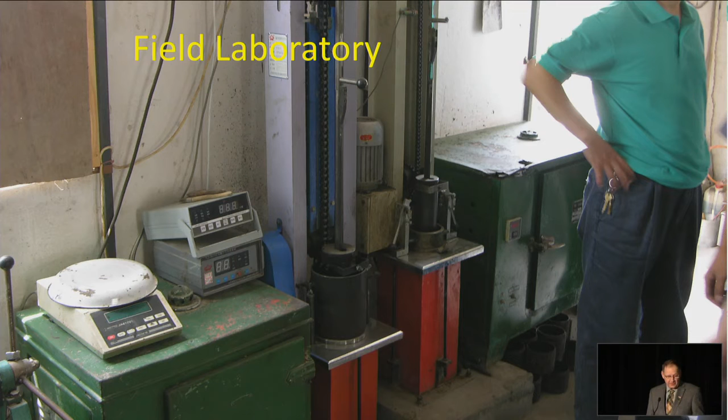Field laboratory was kind of like you'd expect to see in a lot of places. This was Marshall mix design that they were using. You can see the Marshall hammer there and some scales. They were using an NCAT burn-off oven for evaluating asphalt content.

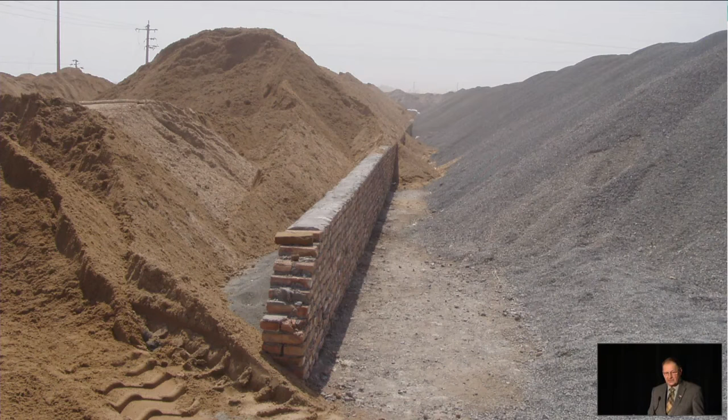Here's what the aggregates look like. They were quite a hard limestone, a fairly high specific gravity limestone. There's the stockpiles of aggregates, pretty much a very good quality operation of a hot mix plant that you'd expect to see of any good quality contractor in the U.S. or anywhere else. Cold feeds were typical kinds of cold feeds that you'd expect to see here in the U.S.

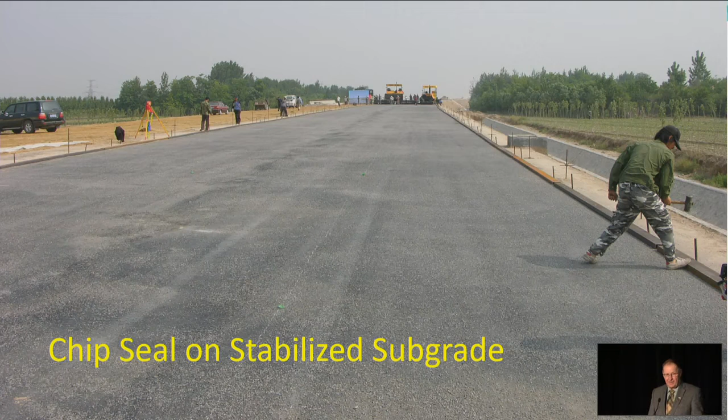Here we are out on the grade. They chip sealed on top of the lime treated subgrade, and then applied tack coat on top of that chip seal. There you can see the trucks lined up and ready to discharge their mix. They used echelon paving, so they had 2 pavers to pave the full width of inside shoulder, 2 lanes, plus outside shoulder. So they paved all at once.

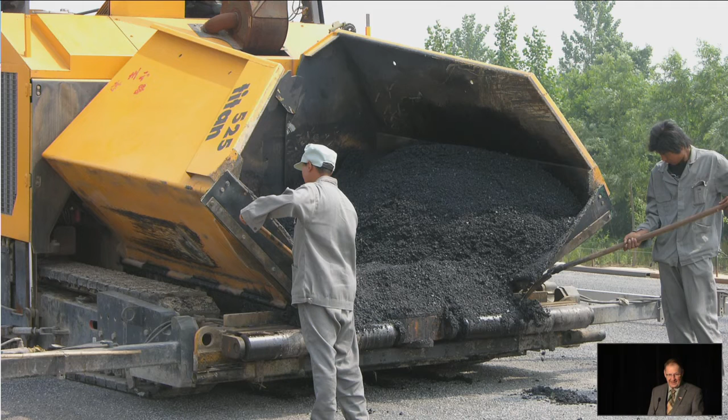These were very large pavers, and I don't remember the model. Well, you can see it's an Ingersoll Rand Titan 525. If you want to go look it up, at the time I think it was the 2nd largest one that they made. I know that when the paver was empty, you could easily crawl through the tunnel from the hopper back to where the screed was. It was big enough for a person to crawl on their hands and knees.

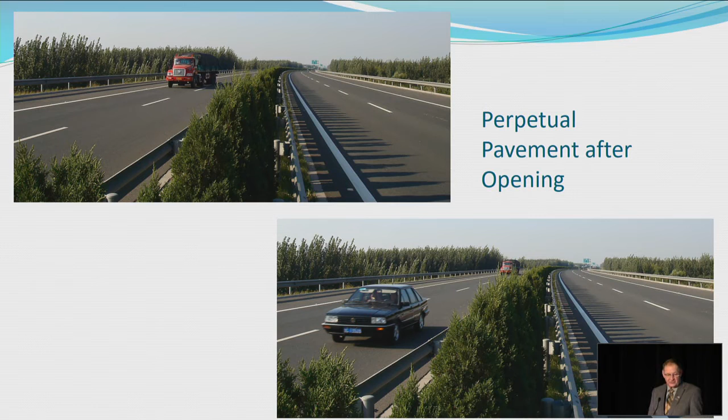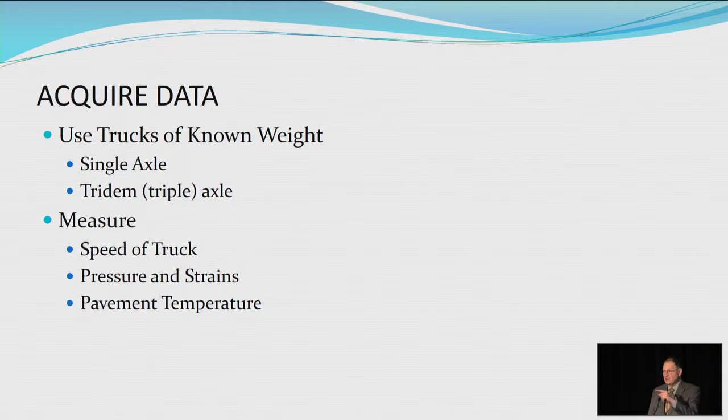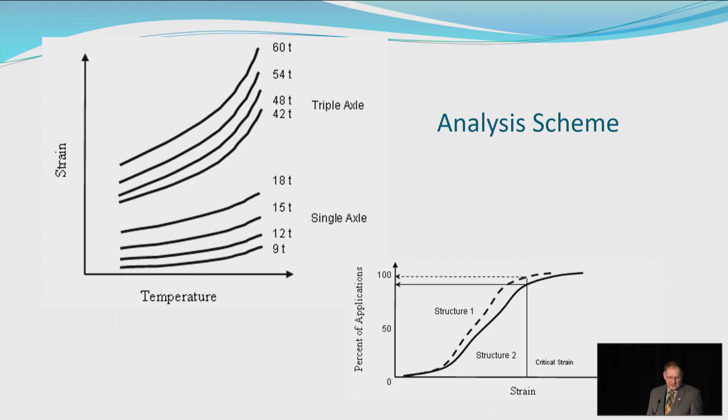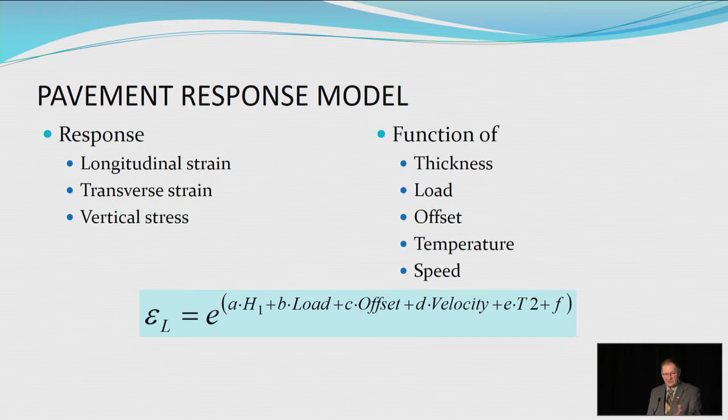Then what we were able to do is analyze the pavement response and determine the longitudinal strain, transverse strain, and vertical stress on the basis of thickness, load, the offset from where we were, the temperature, and the speed of the vehicle. So we had weigh-in-motion, so we had speed distributions of trucks of different weights. There was modeling used to fit and come up with a model for those pavements. And then we collected weigh-in-motion data for 2 years, and we got distributions of actual weights that were going across.

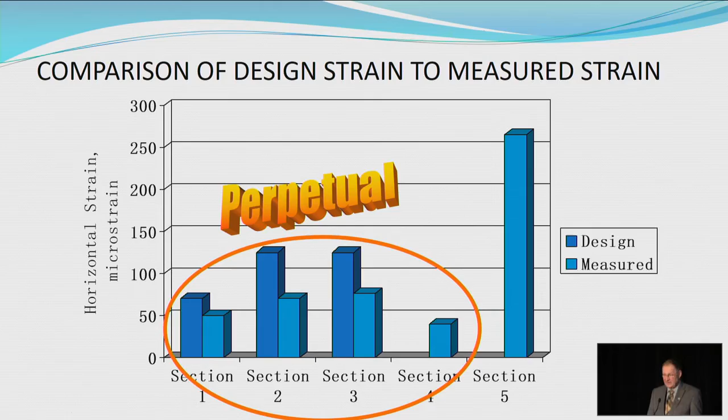So what came out of all of this? Basically, Section 5 ended up being not perpetual, and all the other 4 sections ended up being perpetual. And on the basis of that, after 2 years of research, they actually made changes to their structural design in the province, because they were still in a very large building mode for their interstate highways at that time. So long-lasting pavements can be built to last as long as maybe China's Great Wall. Thank you.

Jerry Reddy, a very good presentation, really interesting work. Zhanping You, Michigan Technological University.

One quick question is, you measured the strain. I think the strain measurement is pretty challenging. Back in 2005, I think, how did you really manage to make sure those strain gauges are functioning well under those heavy loads? Of course, I would assume it's a tensile strain you're measuring, right?

Well, the better person to answer that question would be David Timm. Essentially the role that NCAT played was the instrumentation and the collection of data. That was a huge role in this whole thing. So I have as much confidence in the quality of the strain data as in the quality of the strain data at the NCAT test track.

Oh, yes, thanks, Jerry. David.

So one of our big concerns, of course, were these extremely heavy loads that Jerry was showing there. And what we found is if you put 20 inches of hot mix over a strain gauge, it'll do pretty good. The 6-inch section where you've got a strain gauge underneath those kind of loadings, that section, you didn't have any pictures of it, but I know you've been back to visit that particular section, S5, and maybe you could describe what it looks like, but there's a tremendous amount of deformation. I'm not sure if the gauges are probably working there anymore, but that section experienced a tremendous amount of bending and a lot of deformation. And of course those gauges were only 6 inches from the surface because the HMA thickness was only 6 inches. All right, great. I hope most of the strain gauges basically survived in the entire testing.